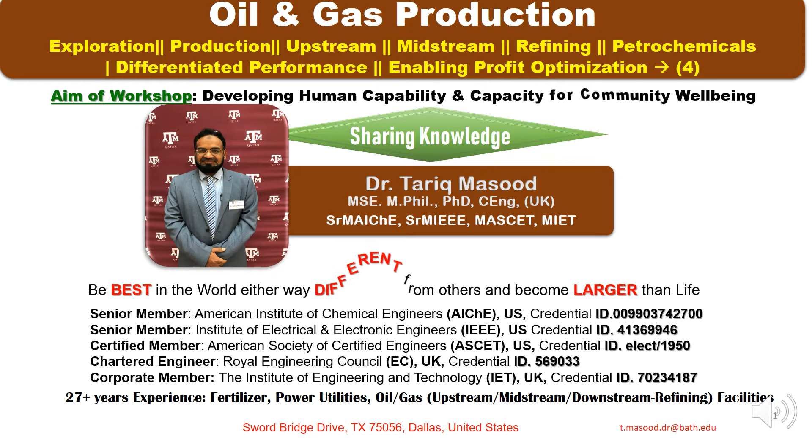So before my lecture, I used to read a Quranic verse. Qala Rabbi Shrahli Sadri wa Yassarli Amri Wahlalu Uqdatam min lisani yafqahu qawli Allahumma Rabbi Zidni ilma. O my Lord, open my chest and ease my task for me, and loose a knot from my tongue, that they may understand my saying. Allahumma Rabbi Zidni ilma. O Allah, advance me in my knowledge and true understanding. Thank you very much again for your precious time.

Okay, my lecture is dedicated to faculty members and student departments of Chemical Environment Engineering at GCT and NFC-IET Multan. In particular, late Professor Dr. Saeed Ahmed, rest in peace, and Professor Dr. Afzal Haque, former Vice Chancellor and pioneer of NFC-IET Multan, Pakistan, former VC at NED UET, Karachi, and Professor Dr. Tahir Imran Qureshi, Maestro of Organic Chemistry.

Number 3, faculty members and students, departments of Petroleum Chemical Engineering, Texas A&M, College Station, and Qatar campus. Faculty members and students, Department of Chemical Engineering, Gas Processing Center, and Industrial Engineering at Qatar University. Management and operation and maintenance staff members of Pak-Arab Fertilizers and OGDC Pakistan, in particular Qadirpur Gas Processing Field, Ghotki, Sindh, Pakistan. Last but not least, I'm very much indebted and pay my deep gratitude to senior executive management and operation and maintenance staff members at Qatar Petroleum from 1997 to 2020. With great privilege and honor, I have completed 24 years of my glorious career at different levels and positions at Qatar Petroleum. Thank you very much everyone for your unprecedented support and belief in me.

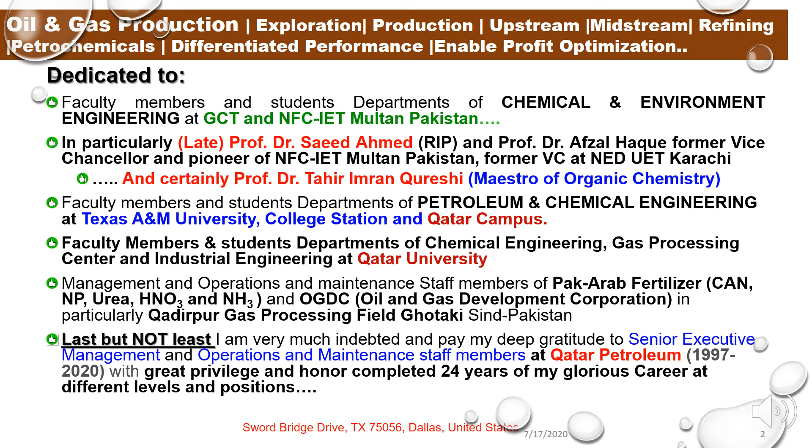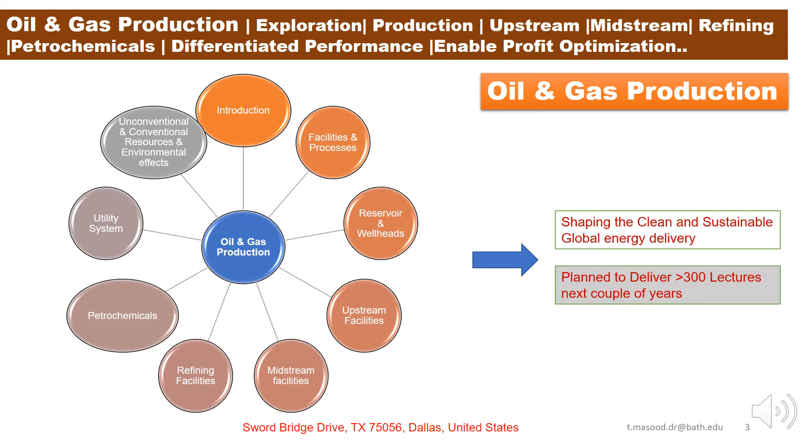This is my future plan to deliver more than 300 lectures on oil and gas productions. Today we're going to discuss introductions, facilities and processes, reservoir and wellhead, upstream facilities, midstream facilities, refining facilities, petrochemicals, utility systems, conventional and unconventional resources and environment effects. What is the ultimate goal? Shaping the clean and sustainable global energy delivery, and probably we will deliver more than 300 lectures in the next couple of years.

Okay, this is a very important slide. It demonstrates my personal contributions for 24 years with Qatar Petroleum. Remember, my whole career I moved against the wind, and everything I took as a challenge, and I never accepted defeat. By using artificial intelligence, the following in-house systems were developed and implemented successfully without any external or internal vendor support, which led to saving $1 million QR for Qatar Petroleum. First, I developed and published Operation Excellence 20 initiatives, framework and TORs. Number 2, developed and implemented a flaring surveillance model to monitor and measure flaring incidents in real-time operation, which captures each molecule of hydrocarbon released from the plant due to any reason.

Number 3, developed and implemented a gas lift management system to overcome gas lift injection deficiency and added 8 to 10,000 barrels of oil every day. Number 4, gas lift injection and gas balance dashboard developed. Number 5, developed and implemented a chemical surveillance model to monitor and measure required chemical at each injection point, such as corrosion inhibitor, optimized and saved more than 30% chemical consumption. Number 6, actionable department wise production dashboard. Number 7, actionable OMD dashboard linked with CEO dashboard. Number 8, developed and implemented a power water injection management system in real-time operations.

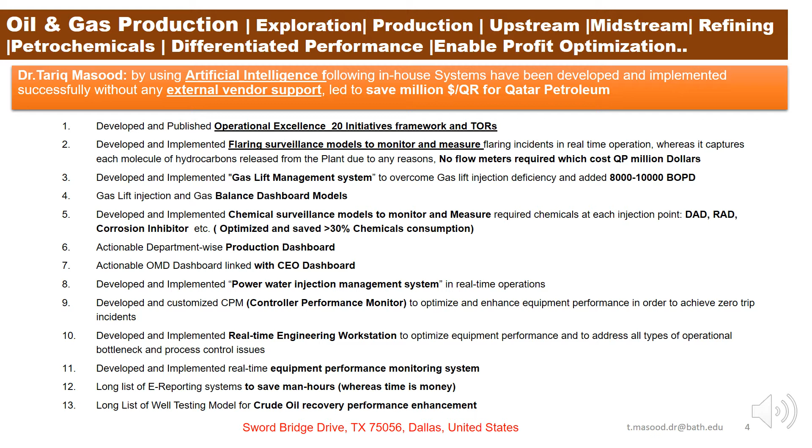Okay, oil and gas production, facility and process, lecture number 4. Today we are going to discuss additional offshore facilities. Okay, key takeaway points from lecture number 4.

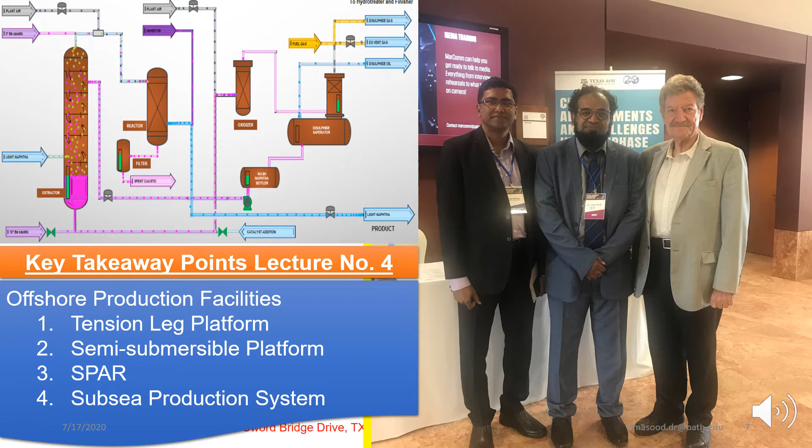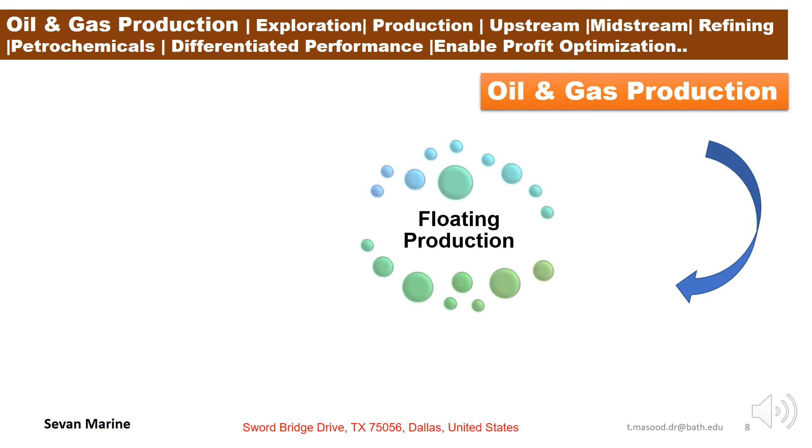First, we will discuss offshore production facilities, tension leg platform, semi-submersible platform, spars and subsea production systems. Okay, my first slide, we are going to discuss oil and gas production. First is the FPSO, floating production storage and offloading. Okay, second is VLCC and post-mooring.

So basically the floating production, storage and offloading main advantage is that they are a standalone structure and do not need external infrastructure such as pipeline or storage. Crude oil is offloaded to a shuttle tanker at regular intervals from days to weeks depending on production and storage capacity. FPSOs are currently producing from around 10,000 to 200,000 barrels per day. It depends on the field capacity.

FPSO is typically a tanker type hull or barge, often converted from an existing crude oil tanker, VLCC or ULCC, due to the increased sea depth for new fields. They dominate new offshore field developments at more than 100 meters water depth. The wellheads or subsea risers from the sea bottom are located on a central or bow mounted turret so that the ship can rotate freely to point into wind, waves or current.

The turret has a wire rope and chain connection to several anchors, position mooring, or it can be dynamically positioned using thrusters. Most installations use subsea wells. The main process is placed on the deck while the hull is used for storage and offloading to a shuttle tanker. It may also be used for transportation of the pipeline. FPSOs with additional processing systems such as drilling and production and LNG production are part of the FPSO.

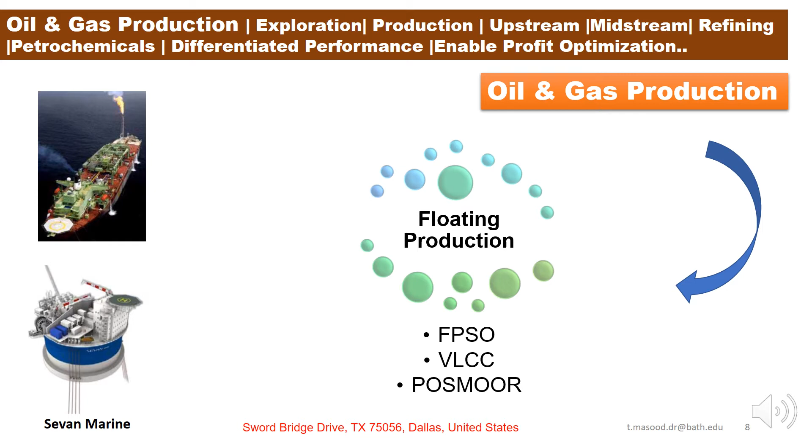Okay, on my next slide, we will discuss the tension leg platform, how it is constituted as far as the offshore platform is concerned. Okay, now tension leg platform, TLP. It consists of structures held in place by vertical tendons connected to the sea floor by pile-secured templates. The structure is held in fixed position by tension tendons which provide for use of TLP in a broad water depth range up to 2000 meters. The tendons are constructed as hollow high tensile strength steel pipe that carry the spare buoyancy of the structure and ensure limited vertical motion as demonstrated here in the picture.

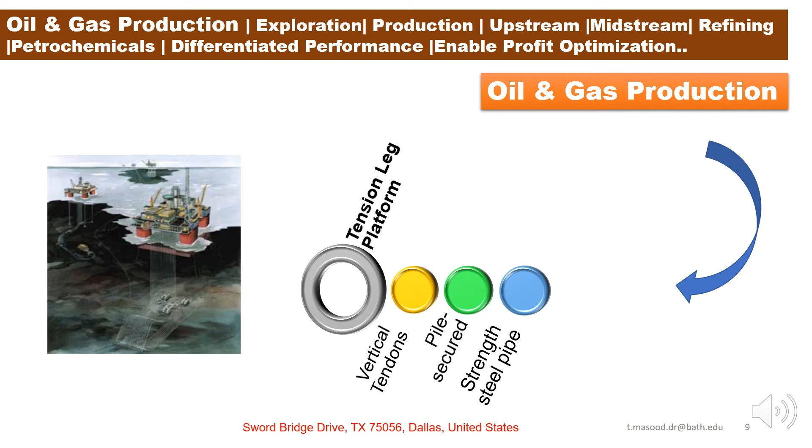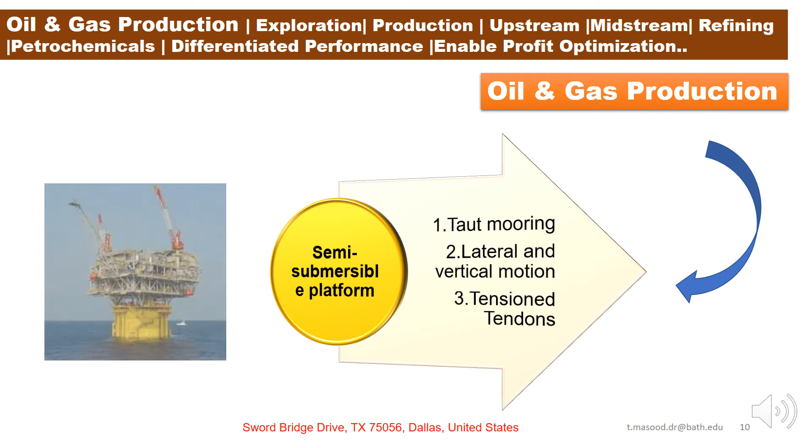Okay, on my next slide we will discuss a semi-submersible platform. It consists of a taut mooring, lateral and vertical motions, tension. Okay, spars. Spars consist of a single tall floating cylindrical hull supporting a fixed deck. This cylinder does not, however, extend all the way to the seabed. Rather, it is tethered to the bottom by a series of cables and lines. The large cylinder serves to stabilize the platform in water and allows for movement to absorb the force of potential hurricanes. Spars can be quite large and are used for water depths from 300 to 3000 meters.

Spar is not an acronym and is named for its resemblance to a ship's spar. Spars can support dry completion wells but are more often used with subsea wells. Okay, on my next slide we will further discuss a subsea production system.

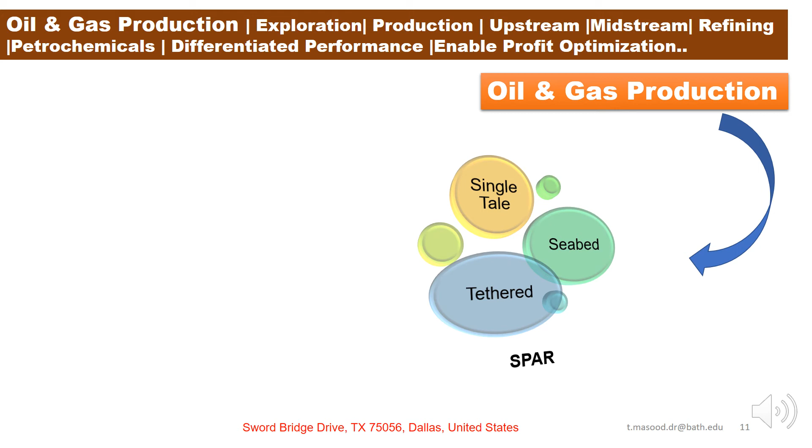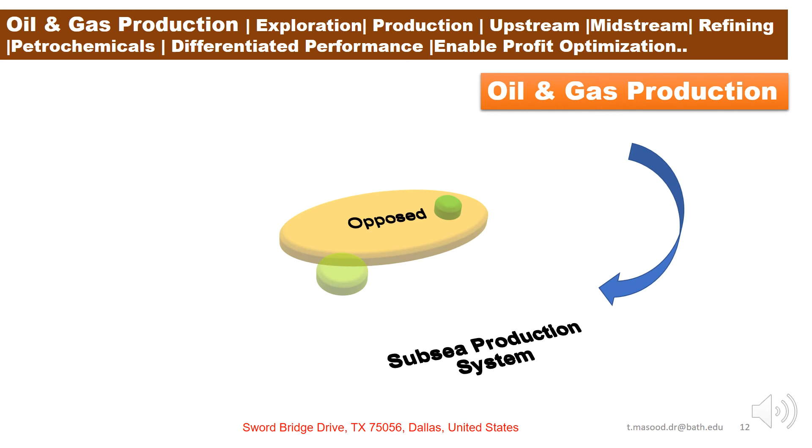Production system: opposed, movable rig, and subsea system. Wells are located on the sea floor as opposed to the surface, as in a floating production system. The petroleum is extracted at the seabed and is then tied back to pre-existing production platforms or even an onshore facility, limited by horizontal distance of offset. The well is drilled by a movable rig and the extracted oil and natural gas is transported by undersea pipeline and riser to a process facility. This allows one strategically placed production platform to serve many wells over a reasonably large area.

Subsea systems are typically used at depths of 500 meters or more and do not have the ability to drill, only to extract and transport. Drilling and completion is performed from the surface rig. Horizontal offsets of up to 250 kilometers are currently possible. The aim of industry is to allow fully autonomous subsea production facilities with multiple well pads, processing, and direct tieback to shore.

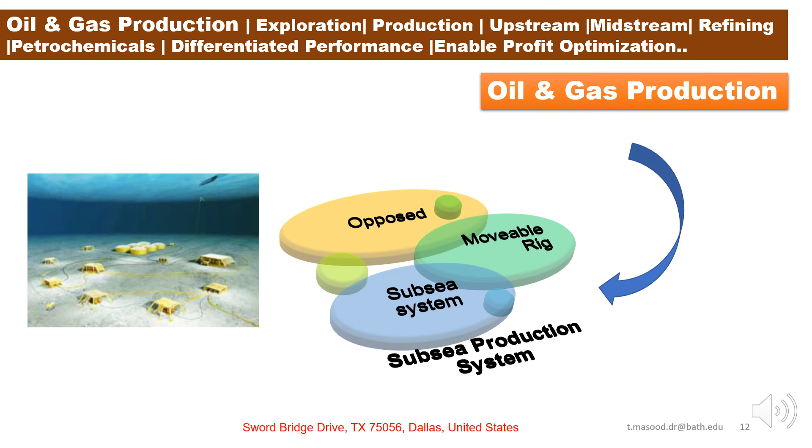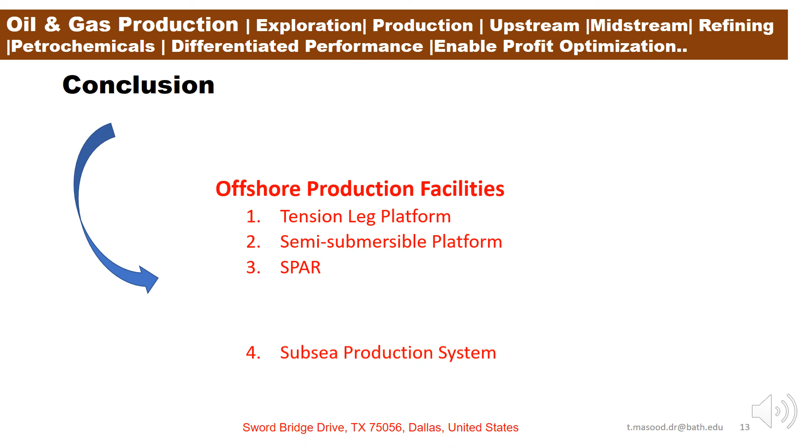Okay, conclusion here. We have discussed offshore production facilities: tension leg platforms, semi-submersible platform, spars, and subsea production systems. We'll discuss upstream processing section, wellhead, manifolds and gathering system, and separation.